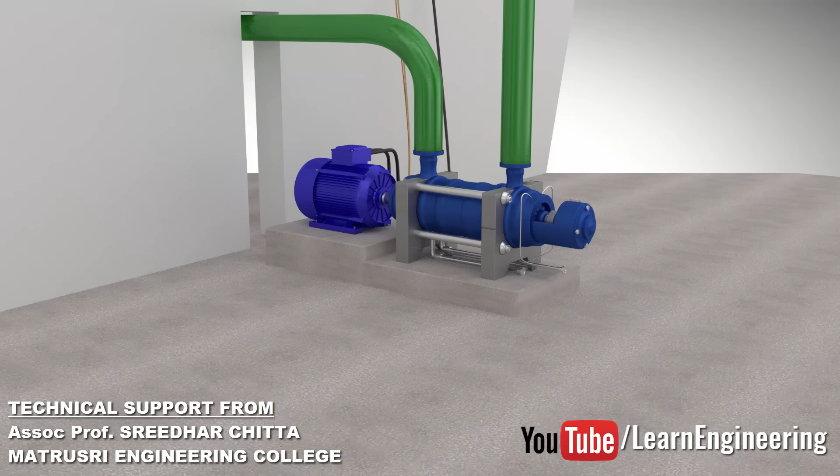Three-phase induction motors are the workhorse of modern industry due to their robustness and simplicity. You might have seen that in order to start a high-power rating induction motor, a starting technique called Star-Delta is used.

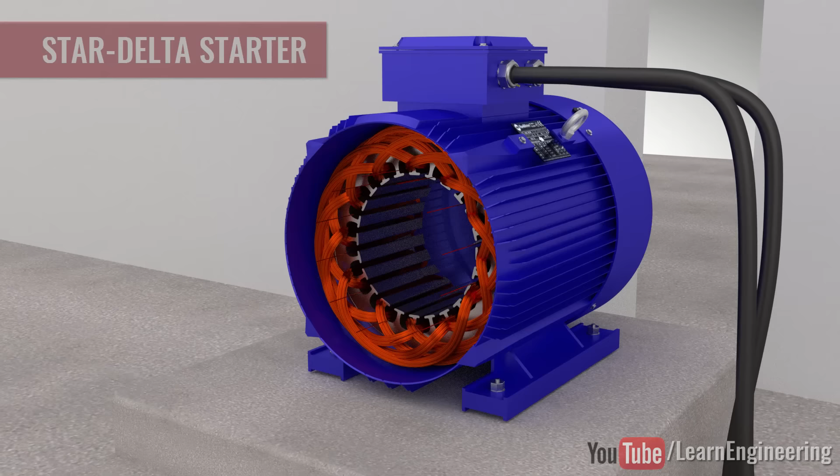In this video, we will understand why a Star-Delta starter is needed and how it is accomplished practically.

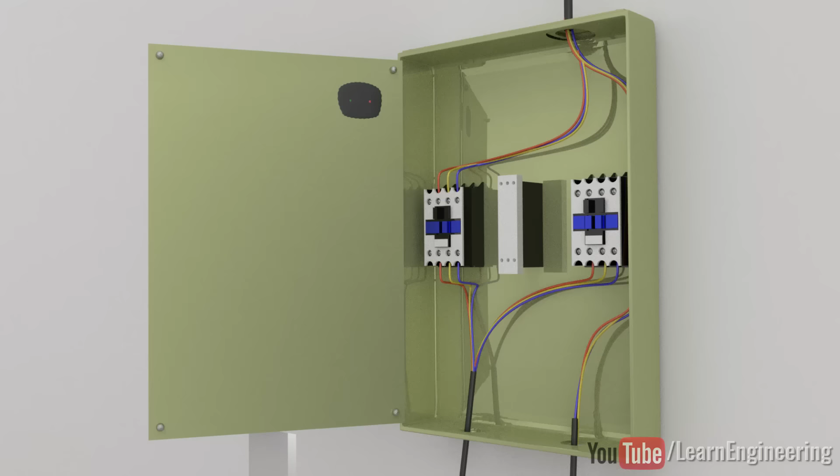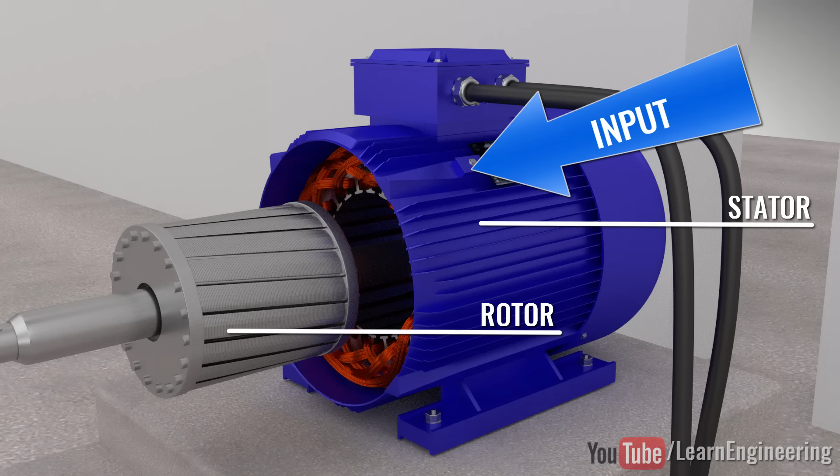To understand why a Star-Delta connection is needed, a proper understanding of induction motor operation is imperative. The induction motor has two main parts, a stator and rotor. The input power is given to the stator. When connected to a three-phase power supply, the stator produces a rotating magnetic field, or RMF, which makes the rotor turn.

When excited by a three-phase AC power supply, this simple coil configuration will produce a two-pole rotating magnetic field.

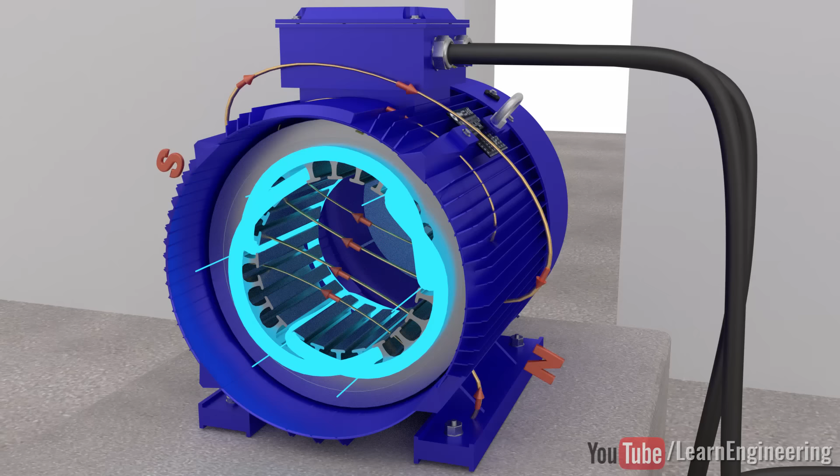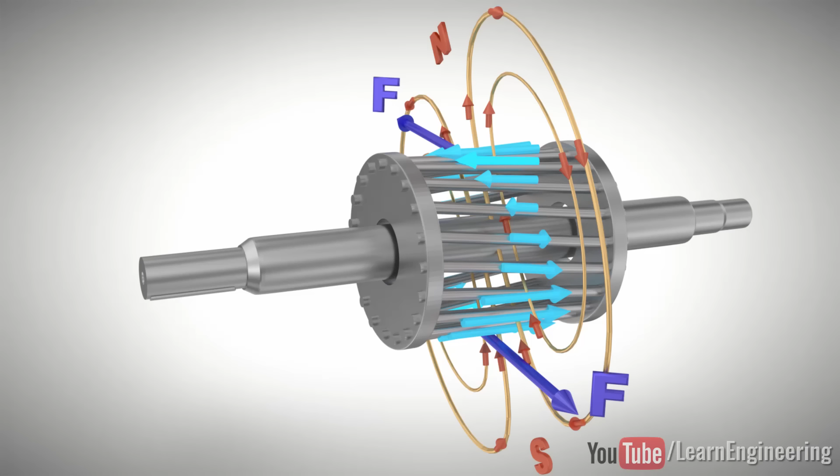This rotating magnetic field will induce electricity in the rotor bars according to electromagnetic induction. So the rotor is like current carrying bars immersed in a magnetic field. This will induce an electromagnetic force according to Lorentz force law, and the rotor will rotate in the same direction as the RMF.

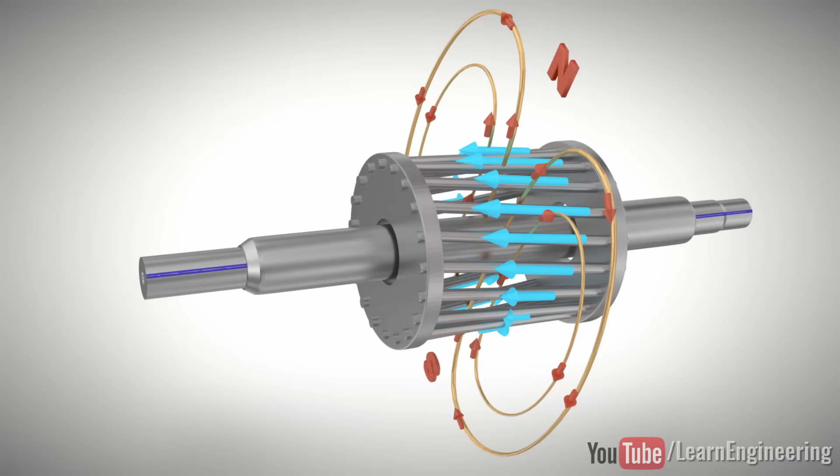This is how the induction motor works. Electricity is induced on the rotor bars due to electromagnetic induction rather than direct connection. So it is clear that the induction motor works due to transformer action. The stator coil acts like the primary of a transformer and the rotor bar as the secondary.

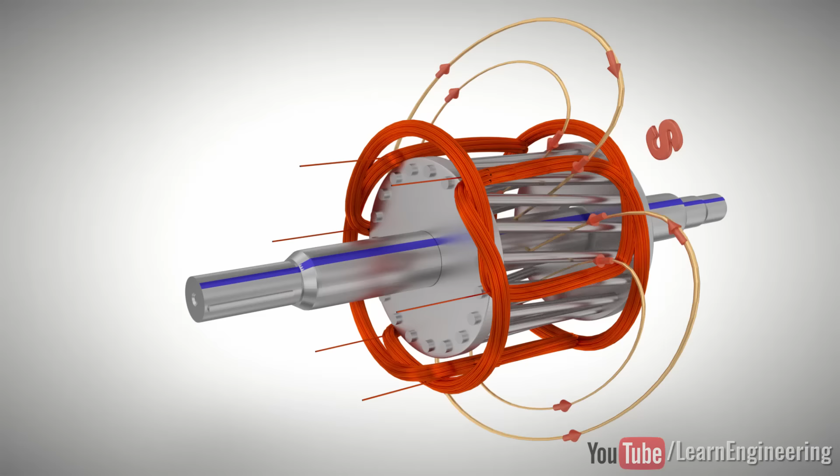Here comes a really interesting problem. Think of the rotor-RMF interaction at the starting of the motor. When the induction motor starts, the rotor speed is 0 and slowly increases. This means the rotating magnetic field will cut the rotor bars at a very high rate.

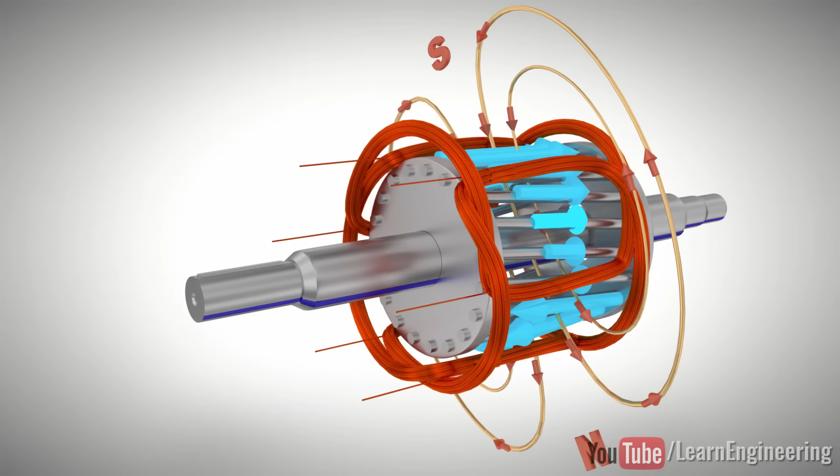As the rotor gains speed, the rate of flux cut will decrease. So a high EMF and current will be induced on the bars at the start. As the rotor speed increases, the current will lower to the normal value.

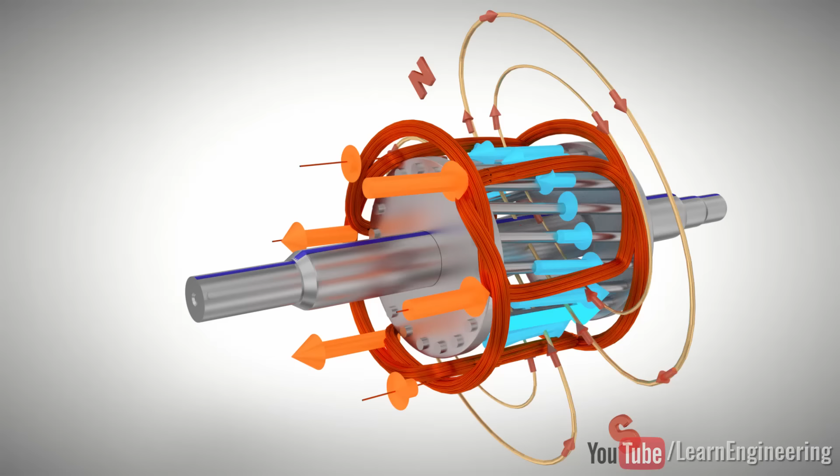At the start, stator current also must be high, since the rotor and stator current are coupled due to transformer action. Due to this, the stator coils will draw a huge amount of current when the motor starts. This will produce a large voltage drop in the line and affect other devices when a heavy rating induction motor starts. How does one overcome this problem?

Star-Delta connection is one of the most commonly used solutions for this. You can see in the current design that all the ends of the coils are free.

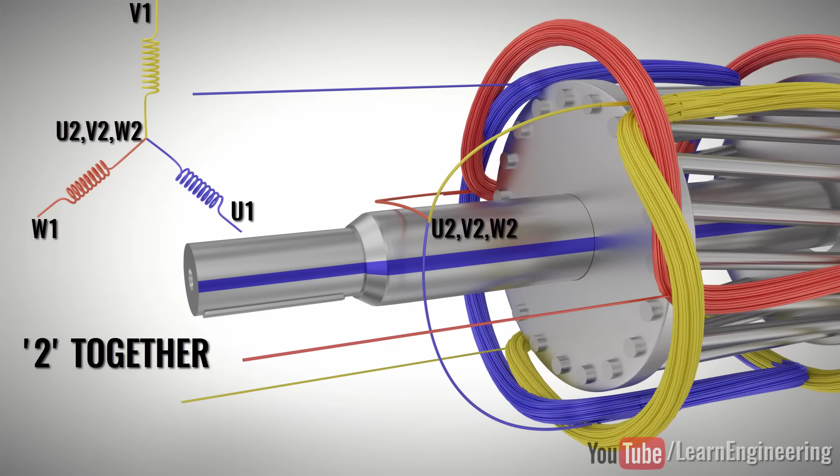We could connect one free end of each of the coils in two different ways: either as star, where the end terminals are together, or as delta, where the end of one coil is connected to the start of the next coil. This is clearly depicted in the schematic.

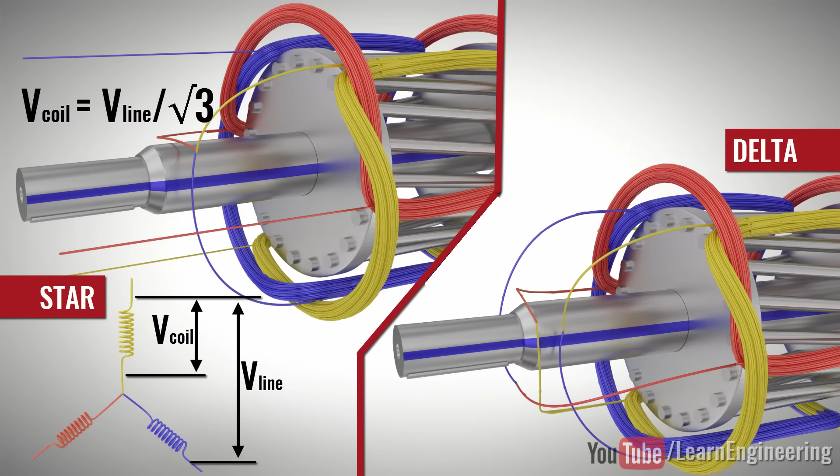When we apply a three-phase voltage across a star connection, each coil will receive a much reduced voltage. Whereas if one applies a three-phase voltage across the delta configuration, we will get the same applied voltage.

So the trick to overcome the high starting current is simple: just connect the coils in star at the starting. Reduced input voltage means reduced current at the stator coil.

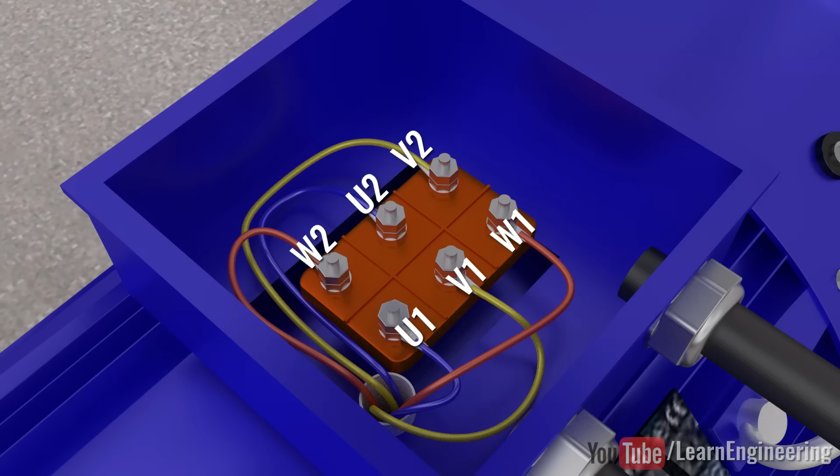To facilitate this connection, all the terminals of the coils are fed to the junction box of the motor. They are arranged in the following manner. Input power is given to terminal 1 of the coils. To connect in star, what we have to do is just connect the second terminals together.

After the rotor achieves a considerable speed, the stator current will be normal so that we can switch to delta configuration. To switch to delta, you just have to connect the terminals as shown.

However, such a manual rearrangement of terminals is practically difficult. In order to achieve this, we use contactors.

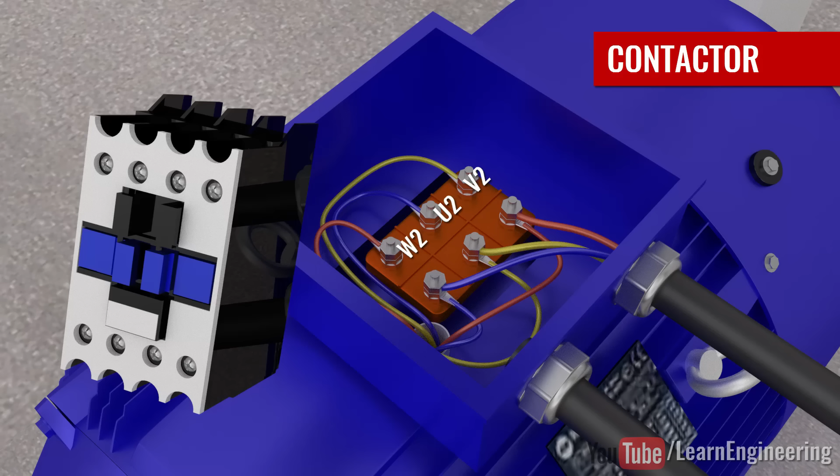Use of contactors is simple. Just draw 3 cables from the second end of the terminal. If these 3 cables are connected together, it is clear that it will result in a star connection. This is exactly what a contactor does.

When this contactor is activated, that will result in a star connection.

To achieve delta connection, the second terminal cables are branched and one more contactor is introduced. The second branch is connected to the input supply as shown. So, if the second contactor is closed, it will result in a delta configuration.

The exact timing of contactor action is determined by a timer. We hope you developed a clear insight into Star-Delta connections.